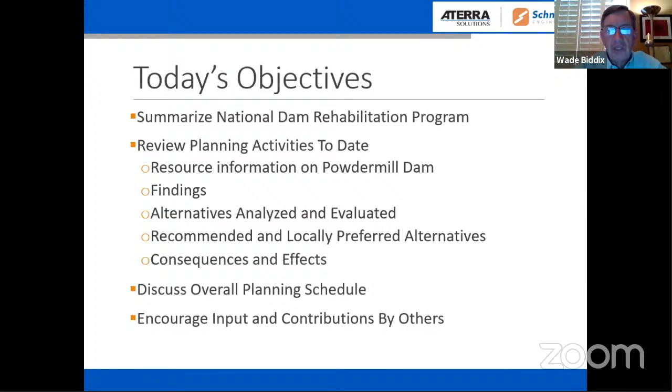So I'm going to go ahead and get started, and we'll run through this PowerPoint. It is quite lengthy because we go into a lot of different details here tonight. So it will hopefully flow fairly well. So today's objectives, we'll summarize the dam rehab program, talk specifically about planning activities that have gone on since last fall, and you can see the different types of things there, as well as discuss the planning schedule and encourage input and contributions by others during the Q&A.

Some key players in this planning process. The City of Westfield is the lead sponsor. The Hampden-Hampshire Conservation District is also a sponsor of these dams in the Powdermill Brook watershed. The technical support is provided by USDA NRCS, and then there's various technical contractors associated with the project.

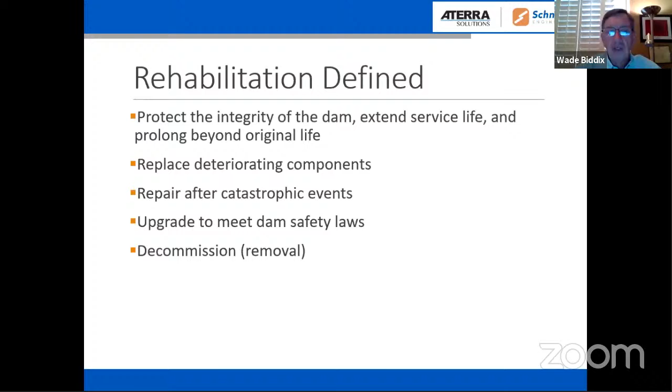Rehabilitation is defined by you can protect the integrity of the dam, extend the service life, and prolong beyond the original life, replace any deteriorating components, repair them after catastrophic events, or upgrade them to meet dam safety laws, or decommission. And as Jim said, this dam is not in imminent threat of failure, but we're upgrading it to prevent any catastrophic issues down the road.

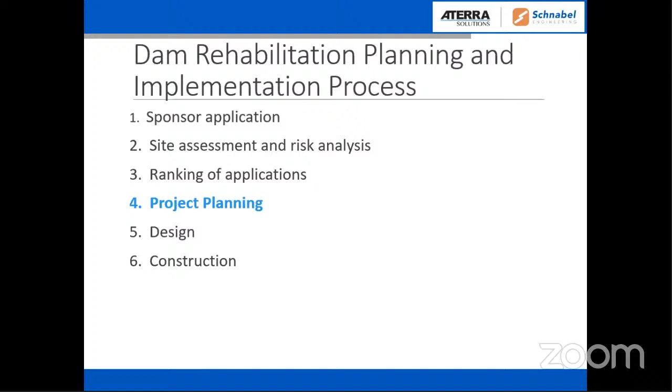The rehabilitation planning and implementation process here is an application, site assessment, and risk analysis, ranking of those applications, and then the project planning. So we're well into the overall process, and ultimately design and construction will come later.

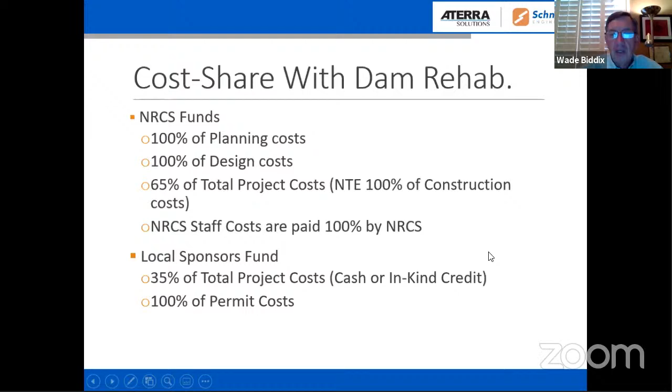The cost share with the program with the local sponsors, Mark mentioned this a little bit, but NRCS can pay 100% of the planning cost, 100% of the design cost, and 65% of the total project cost, not to exceed 100% of the construction. And any NRCS staff costs are paid 100% by the agency. And then the local sponsors pay 35% of the total project cost, and they are responsible for any permit costs, 100% of those.

The purpose and need for action with this dam rehab project: we want to provide the originally planned level of flood protection to the watershed for the next 50 to 100 years while minimizing environmental, economic, and social impacts. So we're looking long-term here. It's not just a real quick fix.

The need is that the present dam structure does not meet current safety and performance standards. So action is necessary to reduce the risk of flood damage to homes, commercial facilities, roads, bridges, infrastructure, as well as to reduce the risk of loss of life due to the breach of the dam. So that's the basic reasons for the project.

Some specific statistics on the dam. It's known locally as Powdermill Dam. It's on Powdermill Brook. It was built in 1965 as a single-purpose dry flood control dam. The drainage area is almost 3,000 acres. At high water, it holds back about 68 acres of water. It's 642 feet long, 50 feet high. It has a 48-inch pipe going through the dam. It was originally constructed as a high hazard dam.

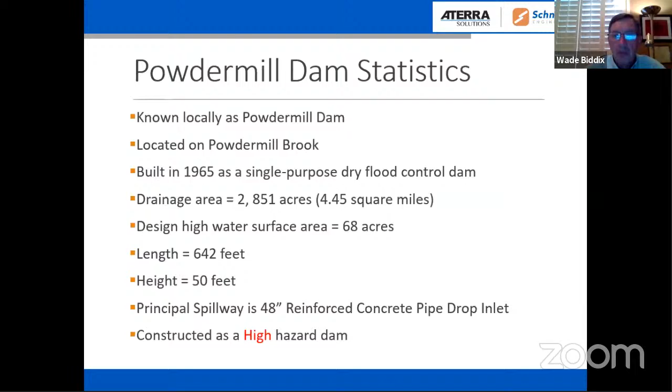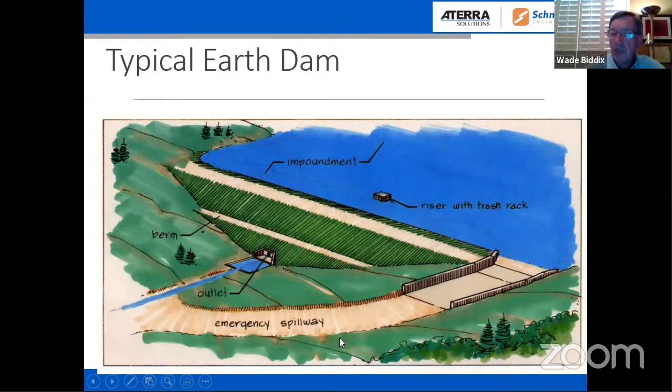So just to make sure everybody's familiar with what we're talking about here, we have basically an embankment across a valley, and then you have a riser out there that controls the normal reservoir impoundment. You have a pipe going through the dam that outlets down here. Normally you have a berm on the back slope, and then you have an emergency or an auxiliary spillway that prevents the dam from overtopping.

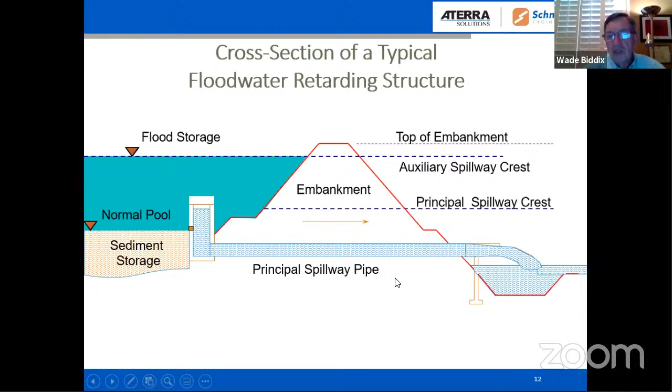If you look at that a little bit from the side angle, we have an embankment. Over on the left, you have the normal pool or the sediment storage that's behind the structure. Then all this blue area here is the flood storage. That's the normal flood storage during a storm event. You have an auxiliary spillway that outlets around the dam. Then you have the pipe through there. So this is what we're talking about with a typical floodwater retarding structure, and Powdermill Brook is very typical of that.

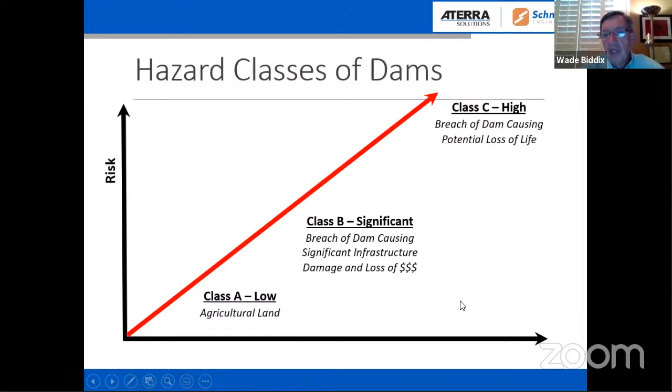The hazard classes of dams: you start in the lower left with Class A, which is a low hazard dam. Basically protects agricultural land or very rural land. Then you step up to Class B, or a significant hazard dam, when a breach of the dam would cause significant infrastructure damage and loss of dollars and value. But up here at Class C, a breach of the dam would cause potential loss of life. So this dam is without question a Class C or a high hazard dam. And the State Bureau of Dam Safety also agrees with that determination.

So the condition or status of the dam: like we said, it's not in imminent danger of failure, so don't panic. Don't say the sky's falling. We're not in that situation. We're taking preventative measures to prevent problems later. The dam was inspected annually and regularly mowed and maintained. And we've talked about the assessment that was done back in 2010. It was given an overall condition of fair.

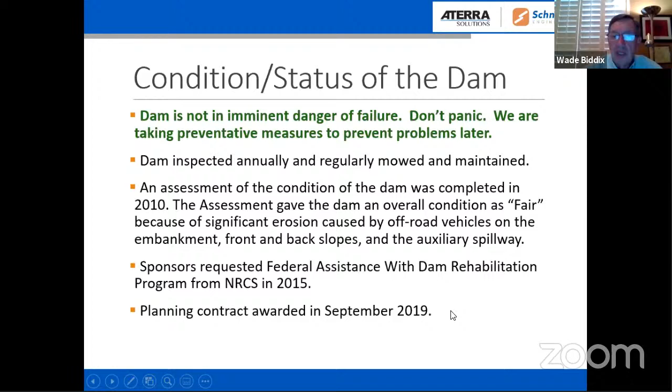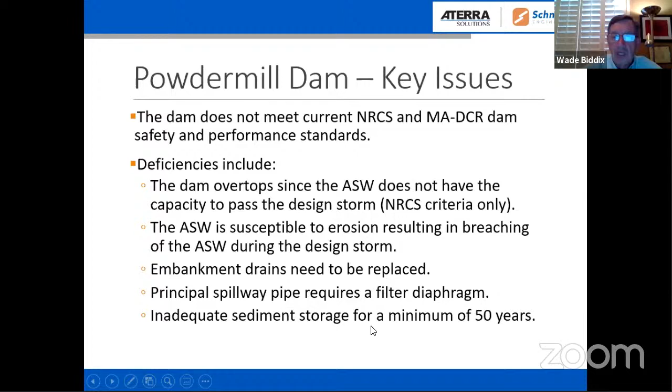So the key issues here, I think, are that the dam does not meet current NRCS and Massachusetts Department of Conservation and Recreation dam safety and performance standards. Some of the deficiencies include: the dam currently overtops since the auxiliary spillway does not have the capacity to pass the design storm, and that's NRCS criteria. The auxiliary spillway is susceptible to erosion, resulting in breaching of the spillway during the design storm. The embankment drains need to be replaced. The principal spillway pipe requires a filter diaphragm, and there's inadequate sediment storage for another 50 years.

So back last year, in November of last year, we had some local public scoping meetings. And scoping is basically to try to set some sideboards for what you're going to do, what you're going to study, and limit the range of actions, alternatives, and impacts considered. So scoping is used to identify the significant issues to be analyzed in detail and to eliminate from detailed study issues that are not significant. So we had a couple of meetings last November.

So the groups of resource concerns are broken into soils, water, air, plants, animals, humans, and ecosystem services. So we're going to talk a lot about those in a little bit. The key here is we want to focus on: is it relevant, yes or no, to the proposed action? And we're talking about rehabbing a specific dam. So that's how we group these different resource concerns.

So now I'm going to kick it over to Tim Sweeney. And Tim, if you can go to the top of your screen, scroll down, there's a remote control. If you can take remote control there, click on that. On your drop down, you should get control of the screen. You see that on the right top when your toolbar comes down? You're muted, Tim. You're muted. Yeah. There. No, what I'm seeing, Wade, is I've got zoom ratio, hide video panel, request remote control. Request remote control. Okay. All right, now you should have control of the PowerPoint. So introduce yourself and take off.

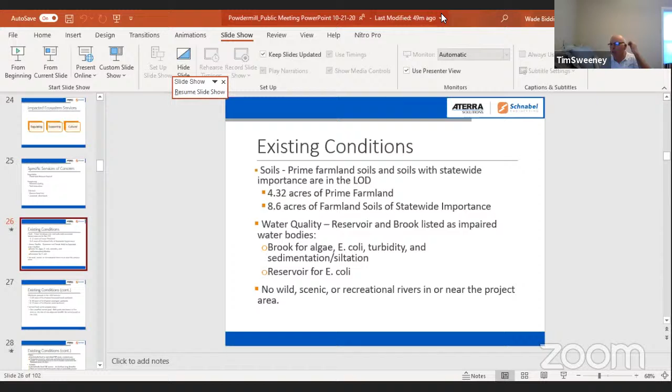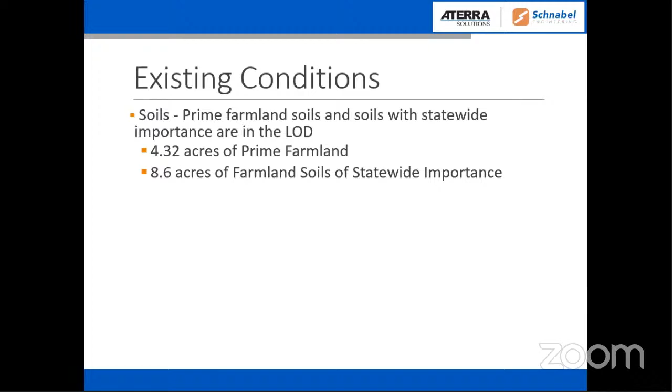So that brings us to the existing conditions discussion. And I think, Wade, are you going to continue on with that existing conditions? Yes, here we go. All right, the existing conditions for the dam. Right now, we have prime farmland soils and soils with statewide importance, which are required for us to take a look at. We have a little over 4 acres of prime farmland, 8.6 acres of farmland soils of statewide importance.

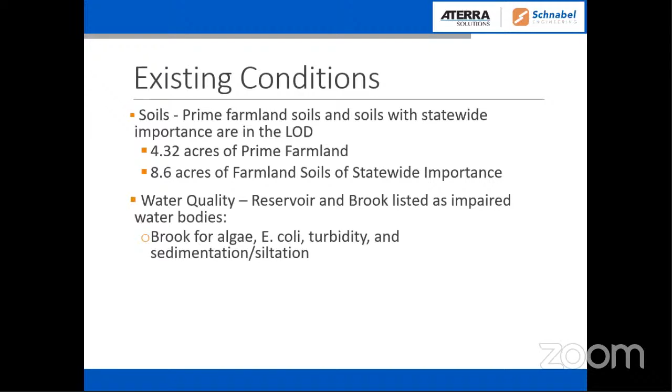Water quality: the reservoir and the brook are listed as impaired water bodies. The brook is for algae, E. coli, turbidity, and sedimentation siltation. The reservoir for E. coli. And there's no wild, scenic, or recreational rivers in or near the project, so that's good. Wetlands present, you can see the acres there. They're fairly small of the different types of wetlands.

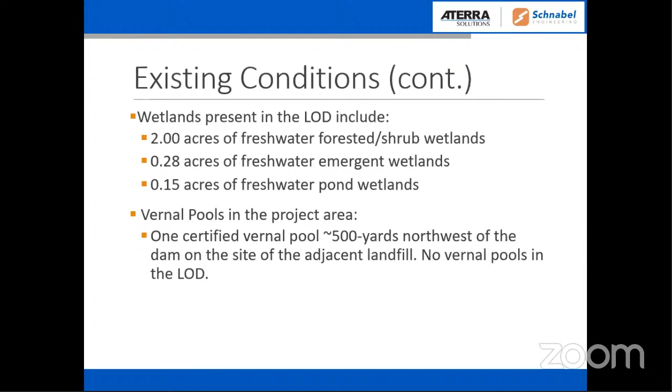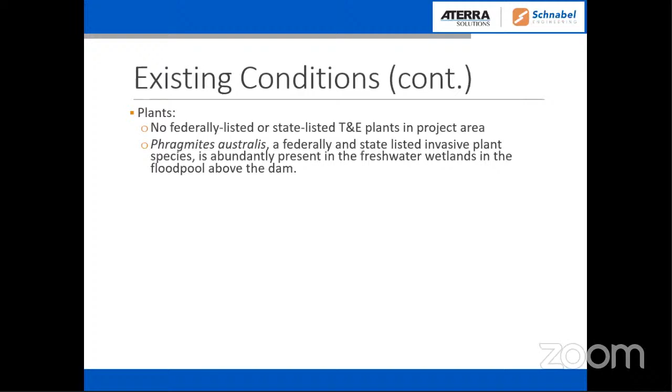Vernal pools, there's one certified vernal pool that's 500 yards northwest of the dam, but there are no vernal pools real close to the dam. Plants, no federally listed or state listed threatened endangered plants in the project area. I mentioned earlier there is some Phragmites present in the freshwater wetlands in the pool above the dam.

Animals, we have one federally listed threatened endangered species, the northern long-eared bat. There are several state listed species that are potentially present. No unusual fish or wildlife identified, no known invasive fish or wildlife species. There are no known occurrences of bald or golden eagles nesting within 1 mile. But there has not been an official survey conducted over the entire project area.

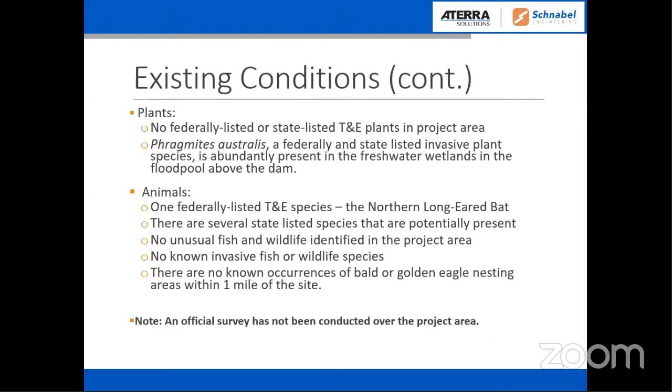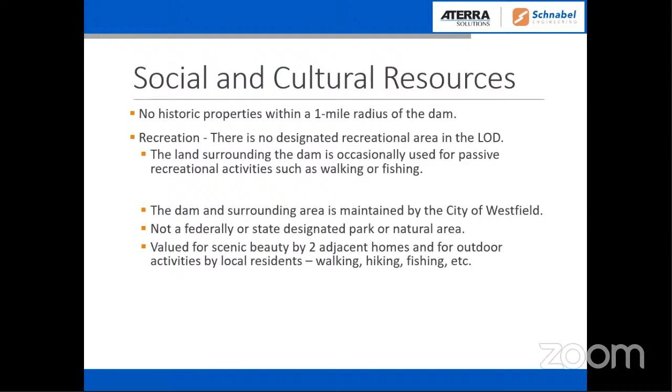The social and cultural resources: the dam and surrounding area is maintained by the city of Westfield. It's not a federally or state designated park or natural area, and it is valued for the scenic beauty by 2 adjacent homes and for outdoor activities by local residents. There's no historic properties within 1 mile of the dam. On the recreation side, there is no designated recreational area, and the land surrounding the dam is occasionally used for passive recreation activities such as walking or fishing.

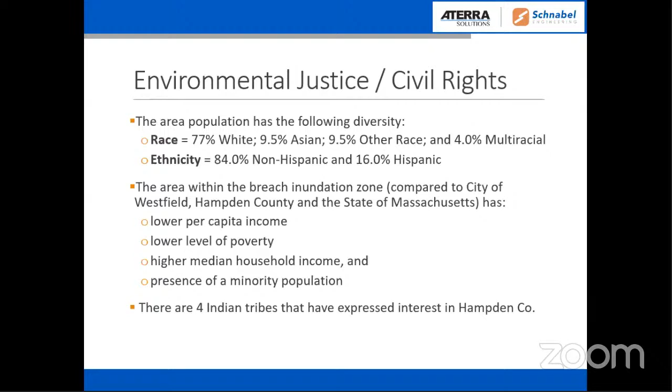All right, environmental justice and civil rights. The area population has some diversity, 77% white, and you can see the breakdown of the other races, 84% non-Hispanic and 16% Hispanic. The area within the breach downstream of the dam, compared to the city of Westfield, Hampden County, and the state of Massachusetts, has lower per capita income, lower level of poverty, higher median household income, and a presence of a minority population. There are also 4 Indian tribes that have expressed interest in Hampden County that we'll keep apprised of the project.

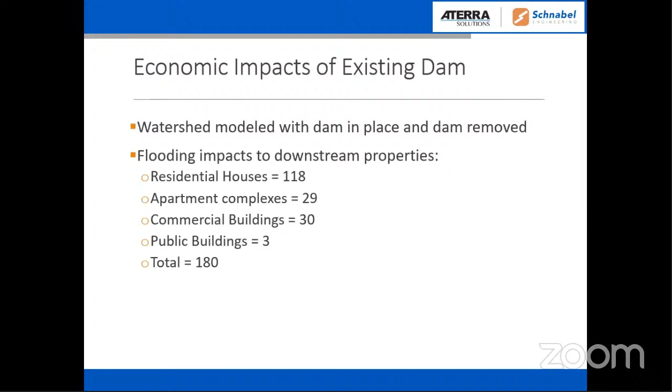Okay, all right. Well, so you should have control now, right?

So we performed several analyses to support the rehabilitation design of the dam, in addition to those that Wade already mentioned to support the economic analysis. So one of the first steps was to evaluate future build out in the watershed to make sure that when we rehab the dam, it is designed for future build out conditions that take into consideration zoning requirements and future potential build out.

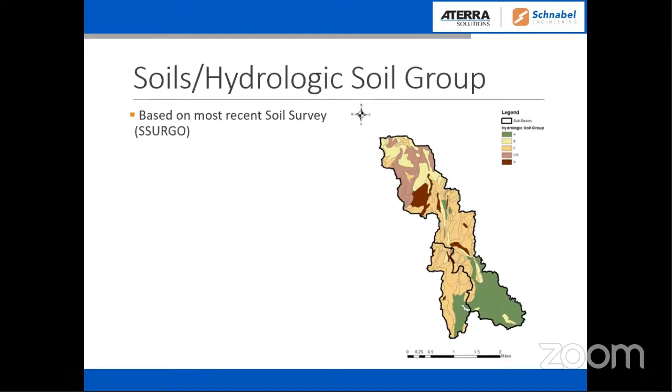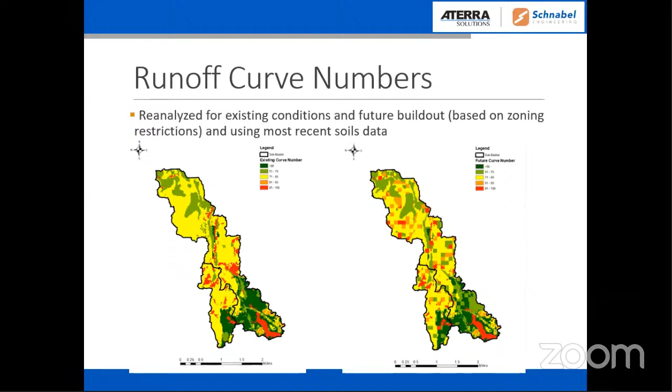And based on that, we reanalyzed the runoff curve numbers, which essentially mean how much of the rainfall that falls onto the watershed is then transformed into runoff and flows towards the dam. Our analysis also included time of concentration reevaluation.

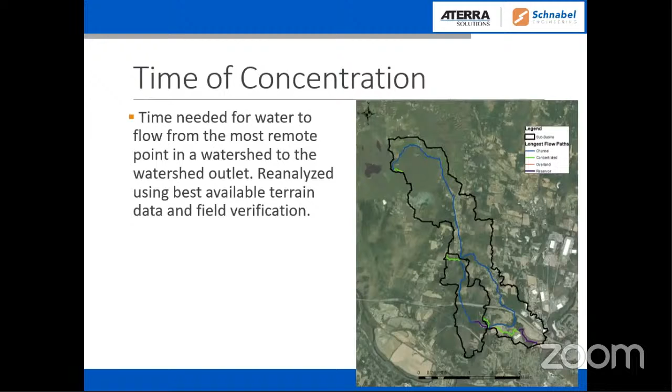We visited the site after we did the initial analysis in GIS. We ground truthed the various segments of flow from the headwaters, the watershed, and came up with an updated time of concentration that reflected essentially the longest flow path in the watershed. And all this data was then used to create a new hydrologic and hydraulic model.

The software that's used for these projects is called SITES, developed by NRCS, and the results of the analysis confirmed the previously performed analyses during the dam assessment, that the dam is overtopped, and it would have to be raised to elevation 205 if the spillway capacity is not increased. The design top of dam elevation, or the as-built top of dam elevation, is approximately 201.3 feet. So that would require a raise of 3.7 feet.

However, along the existing crest of the dam, there are several depressions. Portions of the crest are a little bit higher. So it'd be very simplistic to say that the dam has to be raised by 3.7 feet, but overall it needs to be raised to elevation 205.

The other outcome of the analysis showed that it breaches during the design event, and it also showed that it's not overtopped during the design event from DCR dam safety standards, but the spillway is also breached during that event. I guess the difference is that DCR for existing dams uses a smaller design event than NRCS. It's only half a PMF, and that is the reason why the dam is not overtopped during that design event.

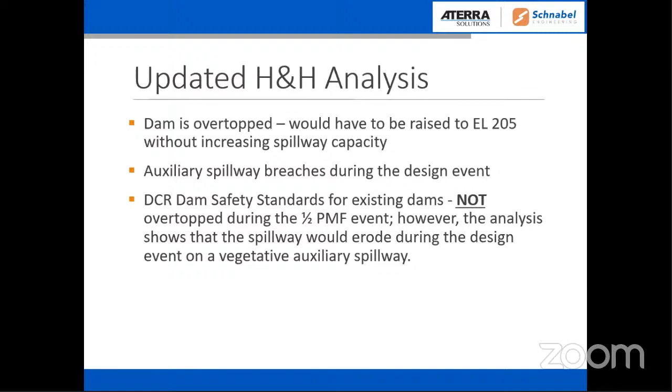We also had to evaluate sedimentation in the reservoir over the years and project future sedimentation. So sedimentation is accounted for in the routings of the storms. And this was a little bit challenging because the dam was originally designed as a dry dam, meaning that there should not have been a reservoir behind the dam. However, at some point after the construction, that pond drain was closed. Water started to accumulate, and as a result of that, more sedimentation occurred.

There are also some other sources of sediment that probably were not anticipated during the design, such as the landfill. There was some logging upstream of the dam. So our sediment survey looked at all those areas behind the dam, and we came up with an annual rate of sedimentation, and we also estimated how much sediment capacity there is left.

So the outcome is that there's not enough sediment capacity left for the additional 50 years or whatever the additional design life will be, and therefore any future rehab options will have to account for additional sediment that's carried into the reservoir.

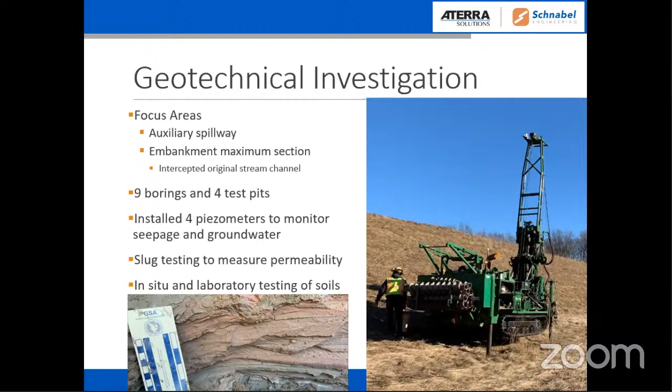So I think what I'm trying to say is we ran a fairly comprehensive and detailed investigation to really get a good handle on how the dam is constructed and what the natural setting is. And then, like I said, we ran some in situ, which is in place, testing in the holes and test pits, as well as we collected samples for laboratory testing of soils.

You can see the photo on the bottom of the slide there. And it's kind of an interesting layering. So just an interesting point about this dam is that it is located on the western side. The Powdermill Brook is a tributary to what ages ago was the glacial Lake Hitchcock that was in the Connecticut River Valley, extending from Connecticut all the way up into Vermont. And as a result, this area has fairly unique geology in terms of the soil deposition.

And actually, without going into too much detail, you can see in the photo the interbedded layers, which were basically seasonal deposits. So that's something that's a bit unique to this area, and we really wanted to make sure we understood it well.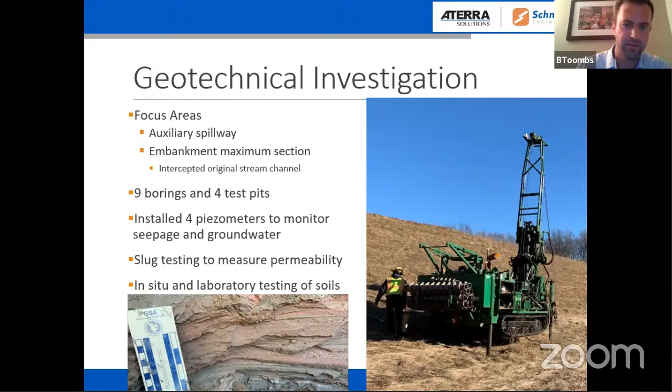There we go. So once we'd gone to the field, we collected all that data. We ran a series of analyses and evaluations to evaluate the dam structure and consider its potential performance under everyday conditions as well as extreme conditions. The first such analysis has to do with filter compatibility and the internal drains.

Essentially, this is trying to make sure that as seepage flows through the embankment, there aren't any issues with that water carrying particles. So we have to run what's called filter compatibility to make sure that the soils downstream of upstream soils are sufficiently filtered, so only water can get through, and that the finer soils don't move out of the dam, which can be problematic. So our analysis looked at a lot of different interfaces in the dam, and everything appears to be acceptable. It's great news.

However, there's an existing toe drain. It's hard to see. It's this purple thing on the downstream side of the dam here. It's basically a sand trench with a pipe in it that's intended to collect seepage. That is what is called corrugated metal pipe. That was the industry standard when this dam was constructed, but is no longer an accepted practice.

These pipes are corrugated metal. They're subject to corrosion and erosion and collapse, which can lead to soils in the dam basically being washed out through the pipe, which can be very problematic, especially at the age of this dam, which is about 55 years. So that's something that we noted.

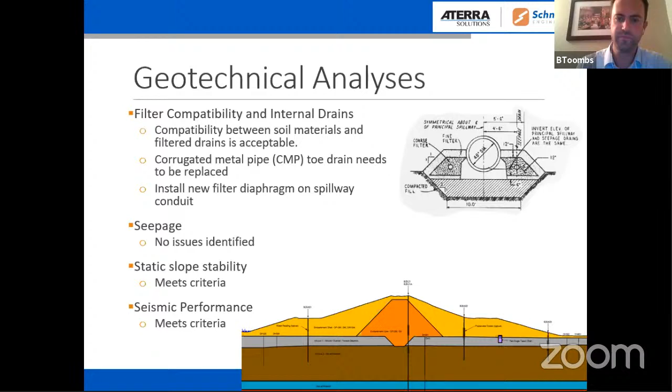Divers actually climbed up the 48-inch conduit. There's a plug installed on the upstream end so they could get access when no water was flowing. And the results were that the concrete structure was found to be acceptable. And the conduit as well is in reasonably good condition, although there are some joints that require some grout repairs.

So that's kind of the field component of our evaluation. From an engineering standpoint, we ran a series of calculations to evaluate the riser in terms of stability. We look at overturning, which is basically if it tips over, or sliding under seismic as well as extreme loading conditions. And our analysis showed that the riser is stable and expected to perform acceptably during design loading.

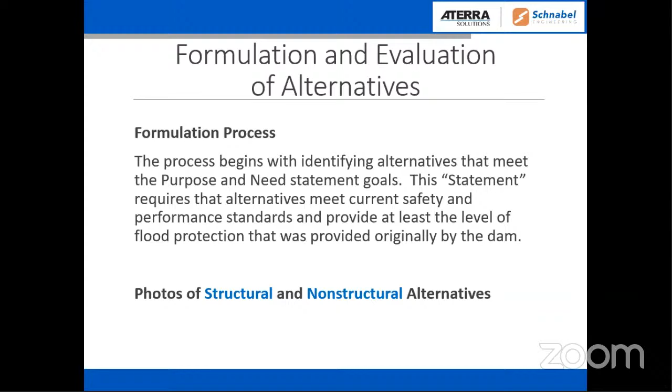But what I'm going to show you right now are just some typical structural and non-structural alternatives for rehabilitation of dams. Some of the required alternatives to be considered are no federal action, decommissioning, removal, non-structural, where we elevate, relocate, or zone downstream of these dams, and then you can have structural rehab to the current criteria.

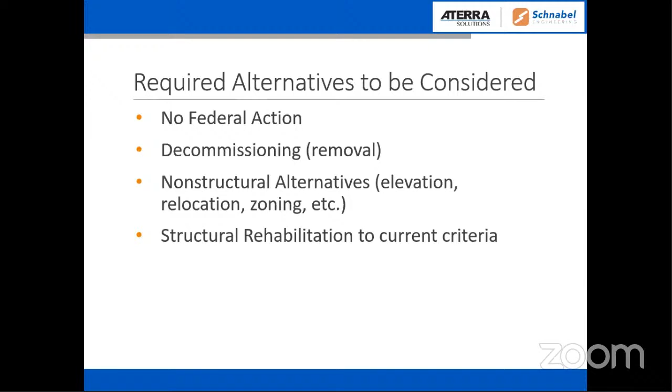Here is a labyrinth weir down in Georgia. You have the impoundment up here, the embankment. There was a path in front of it, and this one is in a dry condition. This is a labyrinth weir. You can see one of these is called a cycle. Here's one in Virginia, and you can see this is a little different design where the impoundment comes right up to the base of the labyrinth weir and the cycles. So this is a way of armoring the auxiliary spillway rather than a vegetative spillway.

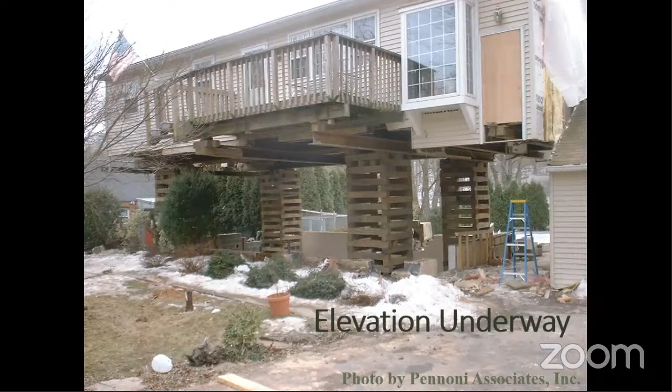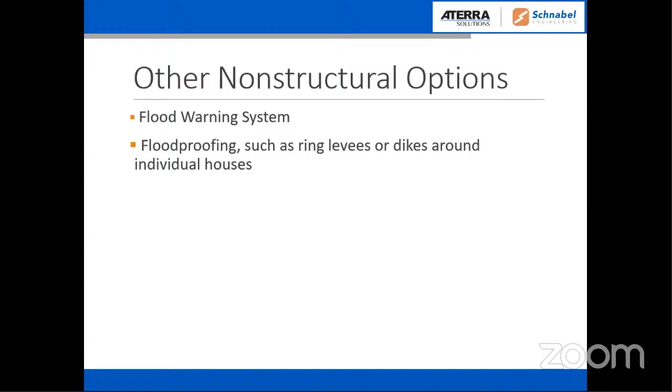Some other non-structural options that we consider are flood warning systems. Those might be where you have a dam farther upstream, where you have a significant lag time, maybe more than an hour to get people out of the floodplain. Where you have dams in fairly close proximity to the affected downstream properties, flood warning systems do not work. You just simply don't have enough time to get people out of the floodplain. Flood proofing, also you can do small ring levees or dikes around individual homes or properties. So that's an option in some situations.

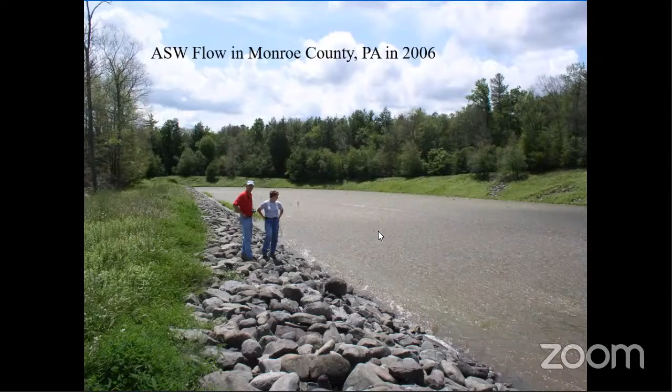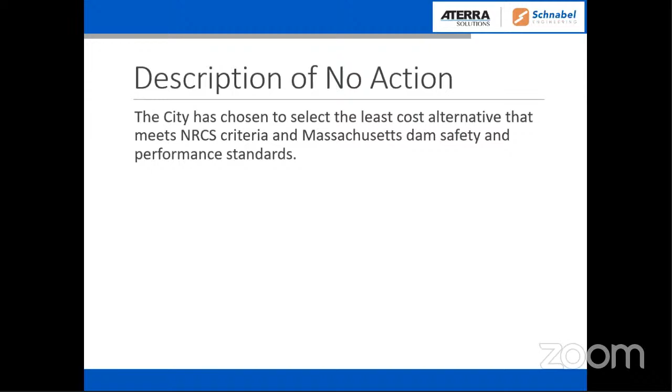So when we do any kind of formulation of alternatives, we always look at a no action. And a no action means no federal action, meaning what would the local dam owners and sponsors do in the case if there were no federal funds involved. So the city has chosen in this case to select the least cost alternative that meets NRCS criteria and the Massachusetts Dam Safety criteria, safety and performance standards. So we'll go into a little more detail on that in a minute.

So some of the alternatives that we considered but eliminated from detailed study is decommissioning the dam. We saw earlier the benefits of the dam. So this alternative would remove the dam, the flood storage functions, and reconnect, restore, and stabilize the stream. Downstream flooding conditions would be similar to those that existed prior to construction of the dam. And any properties within the 100-year floodplain would need to be protected. So this includes addressing induced damages to downstream properties, roadways, and crossings.

So we did enough to say this is going to be very expensive. And just in an order of magnitude, we said somewhere between 15 and 20 million if you did that. So that's a pretty exorbitant cost. So we eliminated that from detailed study.

The non-structural alternative would leave the dam in its current condition while relocating or flood-proofing downstream properties. And it would involve elevating, flood-proofing, or relocating buildings, elevating, modifying roadways, stream crossings, purchasing deed restrictions to restrict any future development. And that was even more expensive than decommissioning. So we looked at those, but the more we got into it, we realized these were not viable alternatives for this dam.

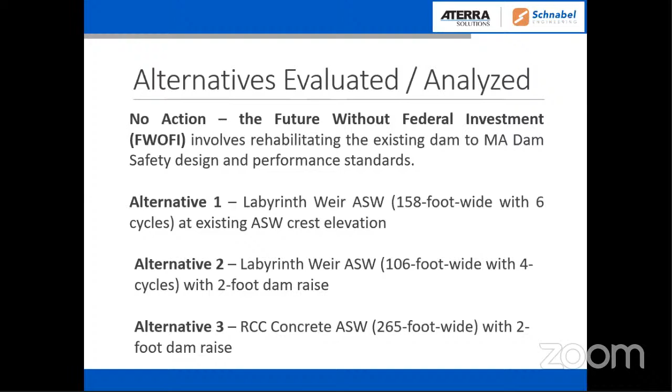So the difference between the no action or no federal assistance and the other alternatives, as Peter has mentioned, is the passing of the probable maximum flood. So the state criteria allows you to at least pass 1/2 of the probable maximum flood. NRCS criteria wants to pass the full probable maximum flood without overtopping the dam. The other requirements are about the same and how they affect the dam.

So just to give you an aerial view of the dam, you get access from the end of Edgewood Drive, Edgewood Street, where the road ends and the power line right-of-way starts. You come along the power line right-of-way, you can see the power lines here, the top of the dam. And then on the north side of the dam is that concrete inlet Brian showed you pictures of. Powdermill Brook comes in.

The 48-inch diameter concrete pipe goes underneath the dam, outlets down here. And the toe drain, the corrugated metal toe drain, is about in this location. Top of dam, the auxiliary spillway here, it's about 7 feet lower than the top of dam, and that's where the flood flows would bypass on that side.

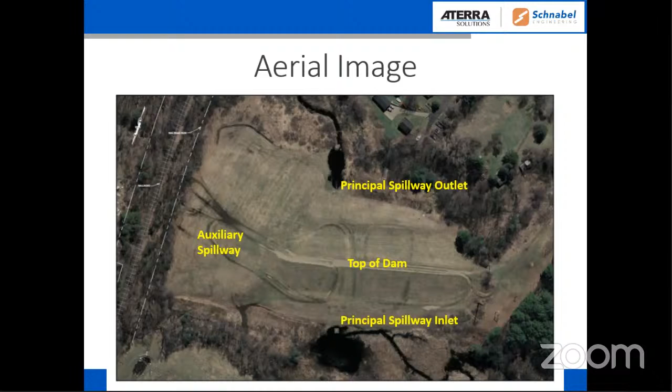So all the alternatives, the no federal action alternative, as well as the 3 alternatives to bring it up to NRCS standards, all involve the same amount of work on the embankment themselves. Basically, the difference for this site boils down to treating the auxiliary spillway. So the principal spillway pipe joints would be cleaned and regrouted, and all the concrete riser and the concrete pipe would be cleaned and a sealant applied to extend the life another 50 years.

A sand gravel blanket, that filter diaphragm, would be constructed around the 48-inch diameter pipe near the downstream end, as Brian said, to prevent any erosion of fine materials from seepage through the dam. The existing corrugated metal pipe toe drain would be filled with grout, which is essentially a concrete slurry. Rather than remove it, it would be a deep excavation, and a new toe drain would be installed closer to the downstream toe. And there's a small amount of sediment that would be removed adjacent to the principal spillway inlet, and the pond drain gate would be removed.

There is some minor stabilization work on the downstream abutment, wet areas, some erosion, as well as some trees encroaching on the right downstream abutment that would be removed also. And all the alternatives result in no change in the current levels of flood protection downstream as a result of the project activity. The next slide, please, Wade.

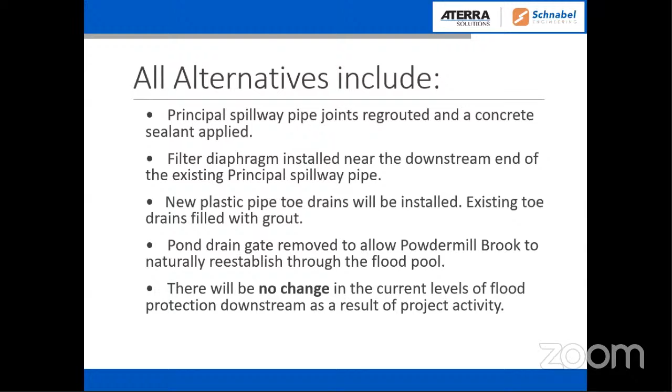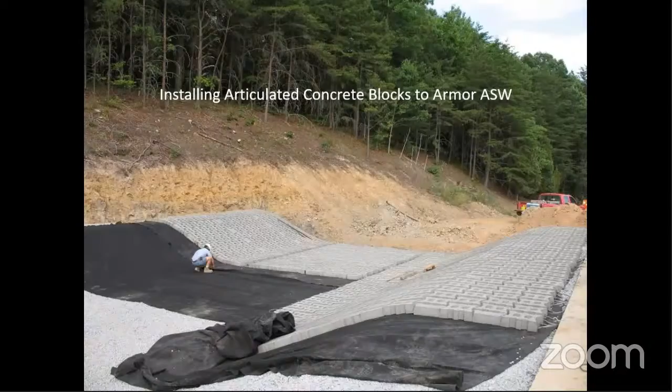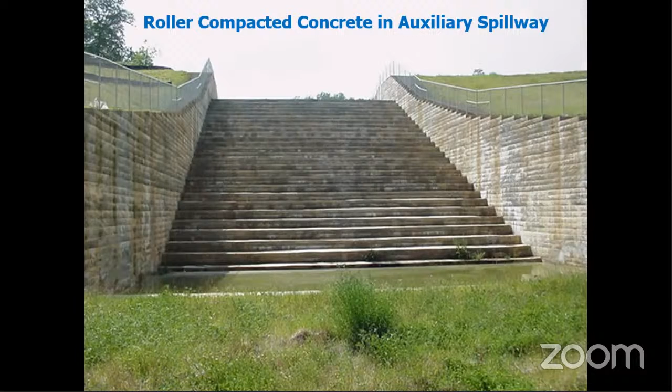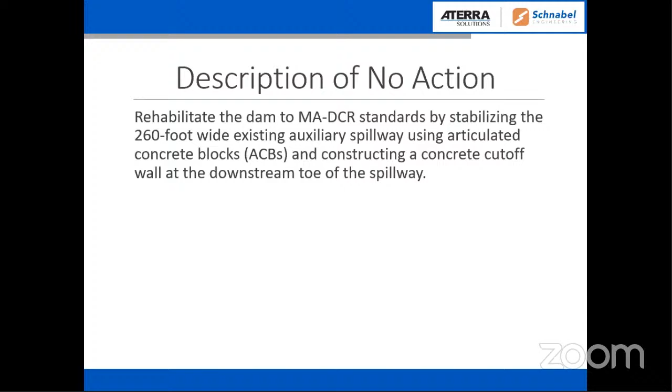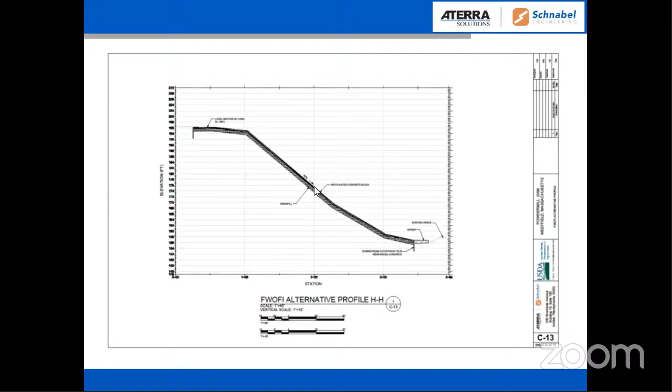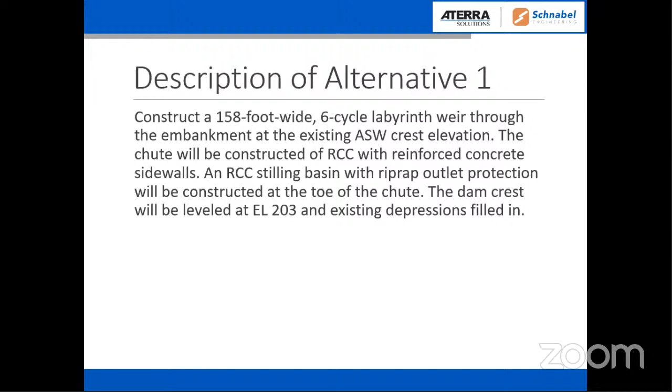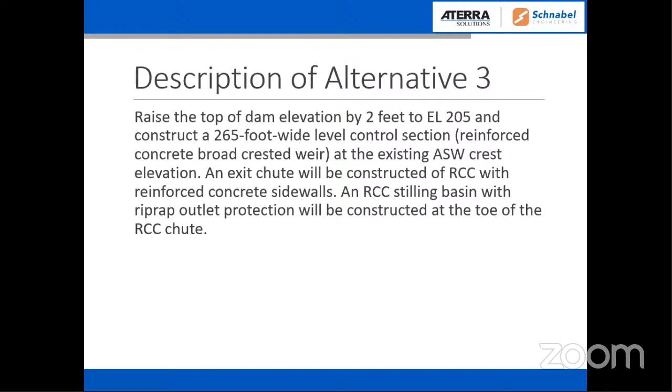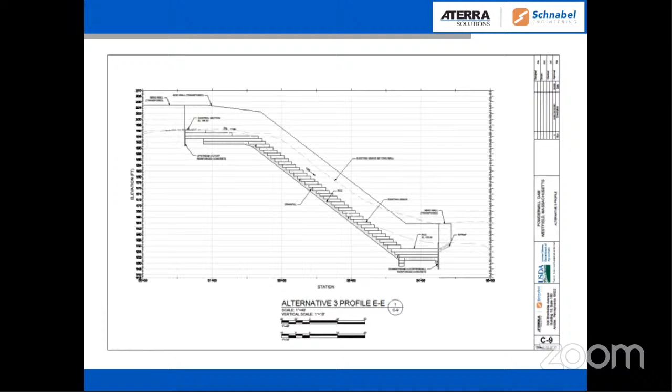So there's no weir that we've seen, the labyrinth weir. You saw the weir at the ground level, the crest. Roller compacted concrete would start at that same level, and then it steps down to the exit channel. Next slide. So that's an overview of the 4 alternatives. I'll turn it back to you, Wade.

Okay. The comparison of alternatives, we're going to first look at cost, and then we'll look at the environmental and other factors associated with each of these alternatives. So this is the estimated construction cost right now. The no action would be $4,555,000. The first labyrinth weir, the little wider one, is almost 7.3 million. The labyrinth weir that's 106 feet wide is a little over 6 million. And then the roller compacted armor alternative 3 is almost 8.5 million. So there's your estimated construction costs.

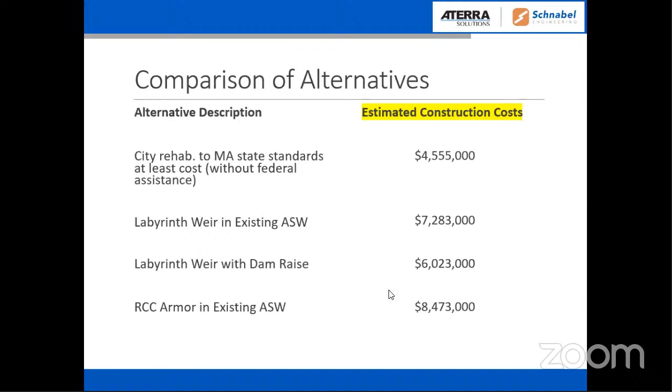When you also include design cost, engineering, quality control, contract administration, all those kinds of costs in here, we're looking at the no action being no federal action at all. It would be 100%. The city's share would be 6.2 million. The labyrinth weir, the wider one, is almost 9 million, and the other one 7.7 million, and then alternative 3 almost 10 million. So those are your project costs estimated at this point.

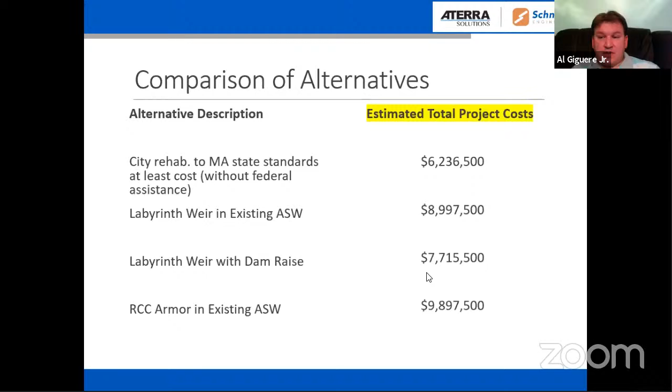Excuse me, Wade. Yes. Just for clarification, the 3 federally assisted ones, that would be reduced to a 35% cost share for the city, correct? That's correct. So they would actually come out cheaper for the city. Yes, and I'll show you those estimated costs in just a moment.

Thank you. So right now, what we would say would be the preferred alternative is based on the NRCS agency planning policy from the Principles, Requirements, and Guidelines. They state that federal investments in water resources as a whole should strive to maximize public benefits with appropriate consideration of cost. Public benefits encompass environmental, economic, and social goals, include monetary and non-monetary effects, and allow for consideration of both quantified and unquantified measures. So what this is saying is, if there's some overriding issues out there that maybe we can't quantify or can't put a dollar value on, then we can consider that, but we should consider cost as a viable thing to look at when we're looking at these preferred alternatives.

Alternative 2 right now is the one that is the narrower labyrinth weir. That's the one that we're saying is the preferred alternative that maximizes public benefits with consideration of cost. So that's the raise of the dam 2 feet, construct that 106 foot wide labyrinth weir along with roller compacted concrete spillway at a total cost of about 7.7 million. When you break that down, federal costs of almost 5.6 million and non-federal costs of about 2.1 million. And again, these are planning numbers. This can certainly change once you get into final design, because there may be some tweaking of these numbers. And certainly, this is an estimate at this point.

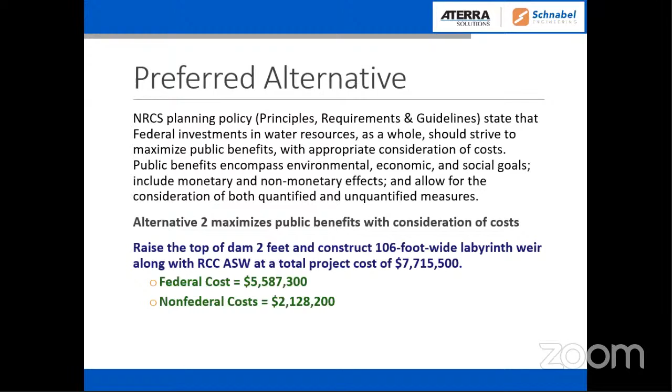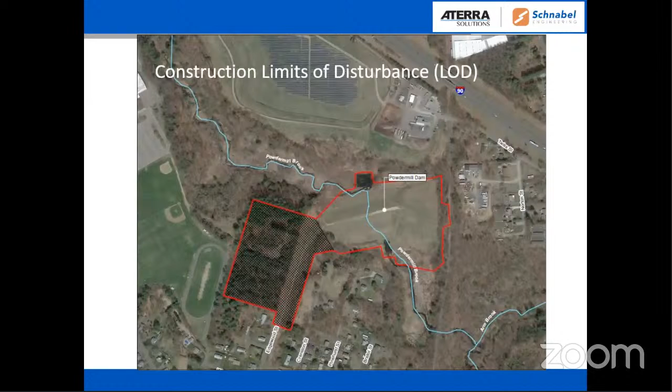And again, these are planning figures and maps at this point. So keep in mind that we're looking at the existing condition. We already have a dam. We're trying to modify the original footprint of that dam and looking at the impacts associated with these different components. So in environmental effects, we are likely to experience some temporary disturbance or compaction during construction.

That's typical. Wetlands, surprising here, we might have some small acres of loss associated with the downstream toe of the auxiliary spillway. There would be a net increase in some freshwater wetlands in some areas along the downstream aprons. Taking the existing impoundment and converting it back to a dry pond would eliminate some of those potential wetlands upstream, but they're likely to reestablish once it's back in dry state. So overall, it's pretty much a wash on the wetlands.

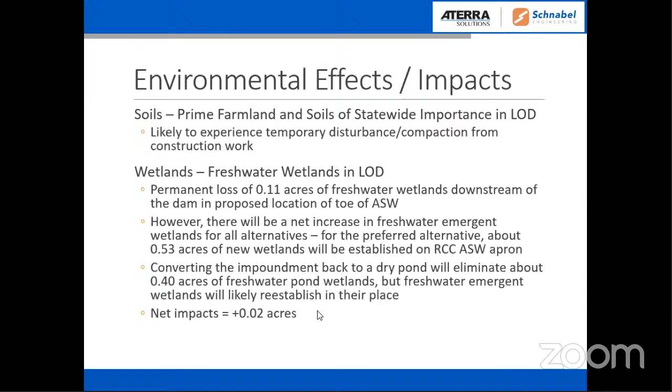So I'm going to turn it back to Tim. Or Tim, since it's really not working, if you want me to just advance your slides, I will be quiet and you can just let me know when to advance them. Okay, that'd be great. Appreciate it. Thanks, Wayne.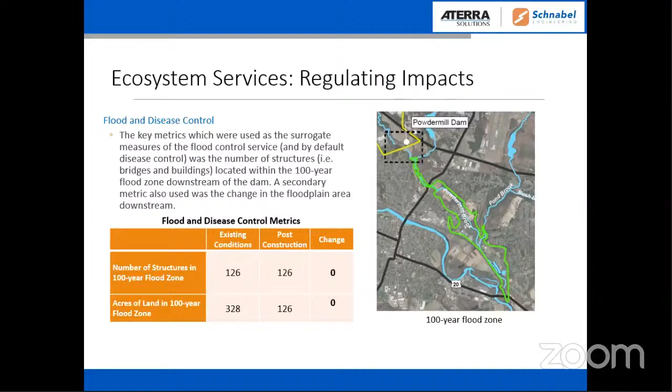So this little table here shows you what we had when we started out the project, the number of structures. I'll just read the slide for you. It says number of structures in the 100-year flood zone. You can see the existing conditions was 126, and after we still have 126 in the 100-year. As far as acres of land in the 100-year flood zone, initially we had 328, and when we finish the project, we'll only have 126 acres of land in the 100-year flood zone. So next slide, Wade.

Moving on then to the supporting ecosystem service. I'll just read you the definition that's provided for the supporting ecosystem service. Refers to underlying processes maintaining conditions for life on Earth, which includes nutrient cycling and soil formation and some other facets of supporting ecosystem services. So we picked nutrient cycling. So the key metric we use to represent nutrient cycling is vegetation, because plants use nutrients, they decompose and provide nutrients, so it's a cycle of nutrient transfer in the environment.

The permanent addition, disturbance, or removal of vegetation will have a noted impact on nutrient cycling. So therefore, we looked at all three alternatives. I'm going to focus here on alternative 2, because that was the preferred alternative, as we've stated earlier. And you can see that the existing condition had 20.05 acres of vegetation initially. And when we finish the project, we'll have 19 acres of vegetation. And that's due to some of the concrete that we're going to put in place. We're going to lose some vegetation. So we had a net loss of about 1 acre, or 208 feet by 208 feet of vegetation.

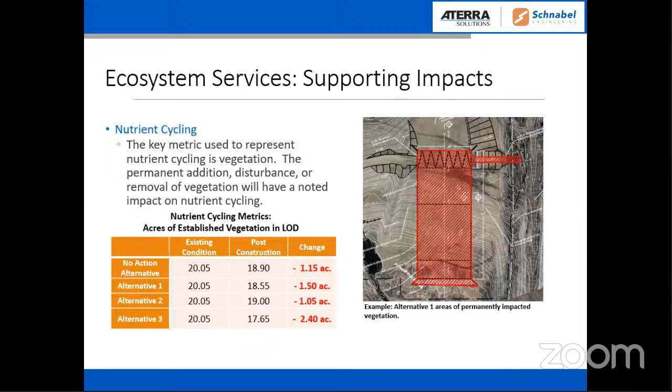The next facet of supporting ecosystem services is soil formation. The key surrogate measure used to represent impacts on soil formation is the change in acreage and impervious surfaces in the limit of disturbance, which is indicated by the red hash marks on your screen graphic. The addition of impervious surfaces will inhibit natural soil formation. In other words, microbes don't exist very well in concrete and other reinforced materials. So we're going to have an impact where we have impermeable surfaces.

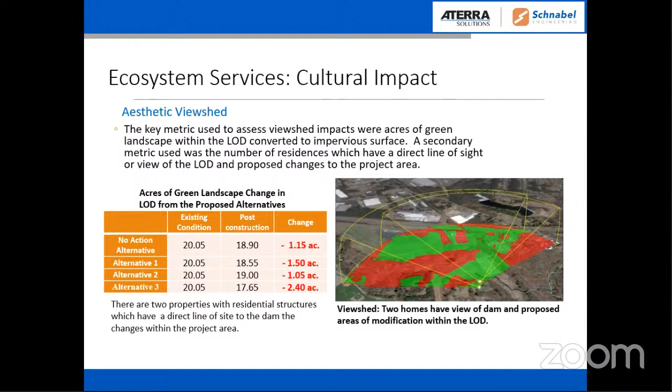I think those are all my slides, Wade. Oh, got one more, sorry.

Again, this is a recreational use category underneath the cultural resource ecosystem service. And the metric used to represent recreational use was the estimated acreage of land used for recreation within the limit of disturbance, which will change as a result of the alternative. So we know that there's some hiking that takes place in the park area. They use the trails and so forth. And so we were concerned with changes in that recreation area.

So looking at alternative 2, we looked at linear feet of trails. So we have initially 605 linear feet of trails within the limit of disturbance. And then after we put the project in place, we'll have 960 linear feet of trails. And part of that is due to the fact that we may do some improvements in some of the trails, and so we end up with a plus 355 linear feet of trail as a result of the project.

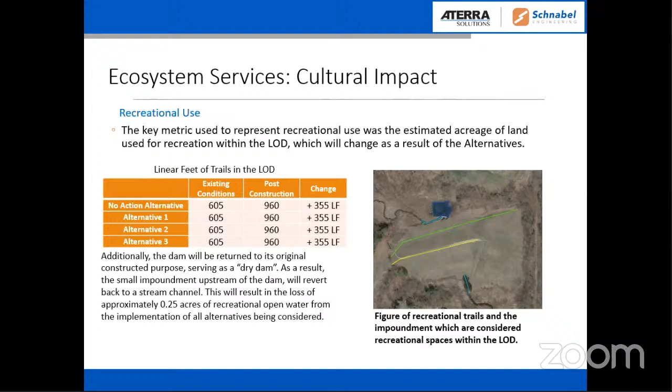Okay, thank you, Tim. And some of the additional environmental effects: vegetation. Trees will be cleared as necessary to facilitate ingress and egress and staging of materials into the construction. And we're estimating that about 3 to 4 acres of vegetation will be cleared in the staging area. Trees will only be cleared as necessary to facilitate construction. So some of the vegetation may just be grasses or shrubs and things like that. We'll try to protect as many trees as we can in that staging area.

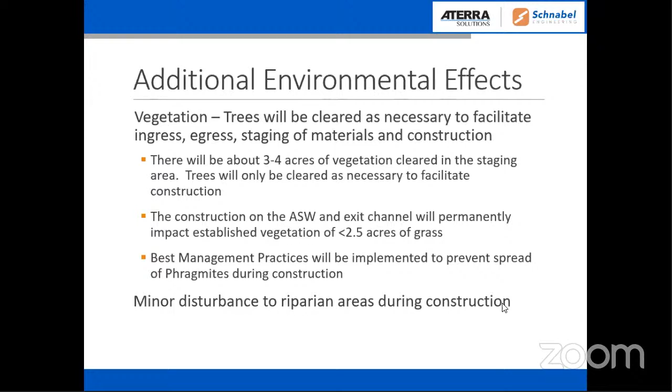The construction on the auxiliary spillway and the exit channel will permanently impact established vegetation, less than 2.5 acres of grass. So we may have replacement of a lot of that, but you heard Tim talk about a lot of the changes that might happen there. Best management practices will be implemented to prevent the spread of the Phragmites during construction, and there would be some minor disturbance to the riparian areas downstream.

Shifting gears to land rights and easement issues, here's a map that shows the original construction and what's happened. This is the dam down here, and the cross-hatched area is the original easement land that was acquired by the city to build this dam. The red line, as you see it here, is the elevation of the crest of the auxiliary spillway. This is where, during flood stage, when it gets up to a 100-year storm or so, it would flow over that area.

And then stepping up to the existing top of dam is the blue line around here, and the proposed 2-foot dam raise would increase up to the yellow line. So the orange or brownish looking land here is owned currently by the city. So the impacts of any additional land rights could extend out on some of these areas. This is Interstate 90 up here, and then the railroad is running along this side. So you can see it's somewhat busting at the seams a little bit and expanding here. So some of these easement areas would need to be considered.

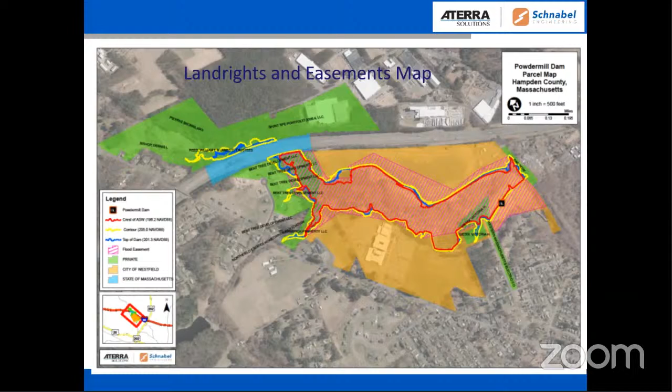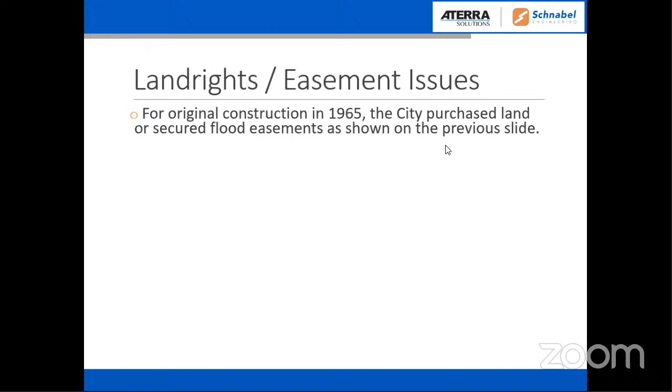So I've got a slide here that shows some of those easement issues. For the original construction in 1965, the city purchased the land as shown on that previous slide. And for rehab, when we're looking at 50 to 100 years down the way, the current NRCS policy requires the minimum land rights upstream of the dam to be to the crest of the auxiliary spillway elevation or the 100-year 24-hour storm elevation, whichever is higher. And it was determined that the auxiliary spillway crest elevation was higher. So that's the minimum land rights that must be acquired, and that elevation is not changing. The auxiliary spillway crest is not changing.

So our economist, James Featherson, will do a flood pool risk analysis, and we're in the process of getting information from the city on easement costs and recording and things like that. A flood pool risk analysis will be performed for all those areas below the new proposed top of dam elevation. And the city will decide whether to acquire the additional flood easements above the auxiliary spillway crest or accept the risk of flooding to the top of dam elevation. Again, you're talking about very infrequent storms that would get all the way up to those elevations. So that has not been completed at this point, but it's a work in progress.

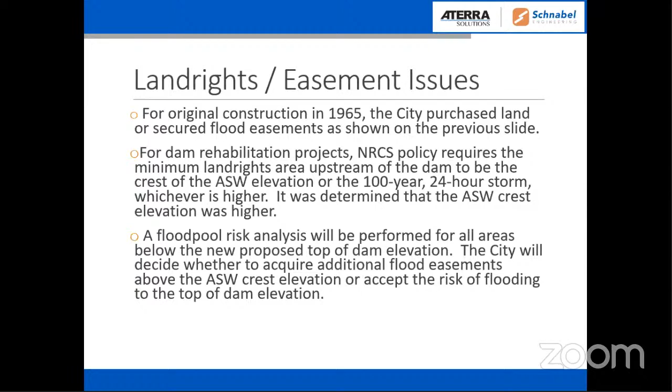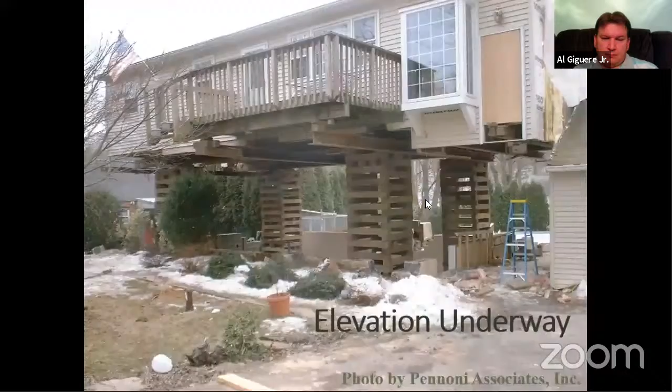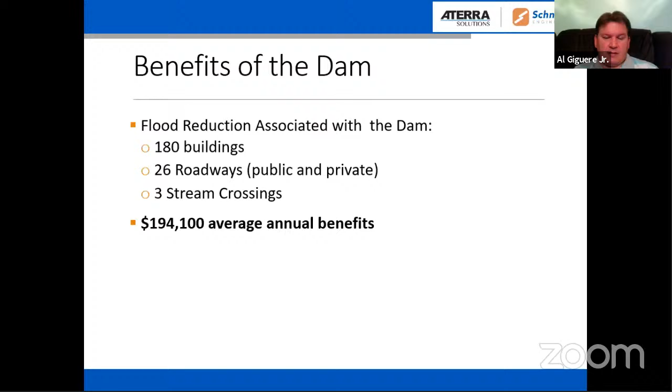Let's see. I do have another question. I'm trying to put it into a way to make sense of it. But there was a slide early on, and I don't know if you can pull up the slide from the beginning, where it was referring to the expected costs of flooding with the dam and without the dam. It was a $200,000 number. Are you able to pull that back up, Wade? It's somewhere in that area. It had two numbers. There we go.

That's it. So just for clarification, the without the dam and with the dam in place is what the cost would be from flooding resulting from if we had no dam at all, or if we have the dam in place with the upgrades and rehabilitation undertaken. Is that correct?

Yes, that's correct. There are still drainage areas that are uncontrolled that get into the downstream floodplain. It's not just the water that's coming through this particular dam that affects the downstream properties. And these are all flood events. It's not just the 100-year flood event. It could be a 500 or 1,000-year event or whatever. So you annualize those damages over all flood events. So there are continuing damages even with the dam in place for all those reasons. It's a lot of uncontrolled drainage as well as other storms that may exceed the design and the storage capacity of this structure. Okay.

Just to follow up on that, Wade. So what was the average time span that was used to get these averages? I'm assuming these are yearly averages. I might defer to James if he is still on. James Featherson is the economist. I saw he was on earlier. James, are you still there? Can you answer that question? Yes, I am.

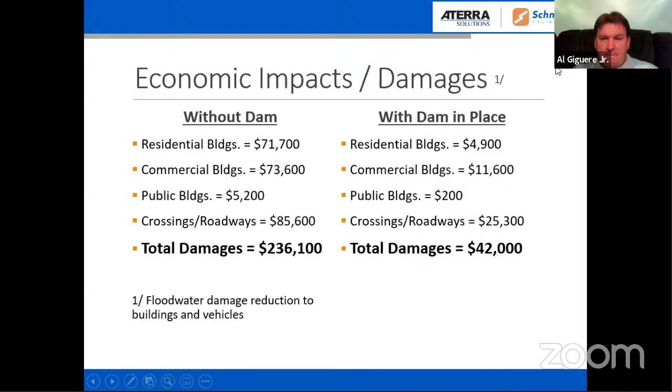Yeah, I'll take a stab at that, Al. So the U.S. Fish and Wildlife Service, who we will be consulting with, stipulates time of year restrictions to protect northern long-eared bats. That time of year restriction restricts the taking of trees greater than 3 inches diameter at breast height from April 1st through September 30th. So during that time frame, there is no clearing of trees on site, to eliminate the risk of taking trees down while bats are roosting in them.

So we will adhere to those during construction, and then once those are down, construction can commence, and that will take care of the potential risk to bats during the project from the Fish and Wildlife standpoint. We're not proposing to put any bat houses up. We're just doing the avoidance measure as recommended by the U.S. Fish and Wildlife Service. All right, thank you, Sal.

All right, City Councilor Kristen Mello. Thank you so much. Can you hear me now? Yes, ma'am. I was just wondering, based on those previous calculations for damages, when we are talking about a very large storm with a rehabilitated dam, what kind of protection are we going to see while the construction is going on? Is there going to be a period of time where the neighborhoods downstream are going to have less protection than we might otherwise? Is there any kind of period where we will be less protected? Thank you. Thank you, Kristen.